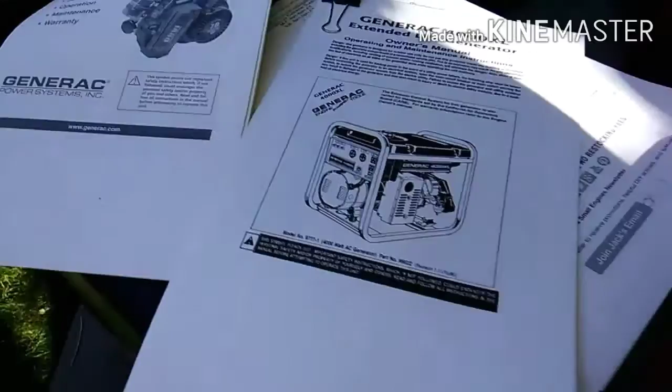Hooray and happy day. So, I printed off these manuals while I was working on this, and I don't need them anymore. And instead of throwing them away, I'll leave them on top of the generator. We're going to do kind of a video bill here / service thing. Anything apart from this carburetor is essentially a maintenance cost and would be needed for any generator. I will go over some of these standard maintenance items now. We're going to go in order of when things were bought.

First thing would be starting fluid, represented by that. Starting fluid cost me, this one's $4.79. Cost me about that. You know, this one would be $5 with tax or whatnot. Anyway, billed you $4 for starting fluid. Used to diagnose things. Won't start. Spray starting fluid in it. Starts running. At least you know you have spark. It's running funny. Spray a little bit of starting fluid in there. See if it starts running smoother. Ooh! An example from the media bin using your own motor.

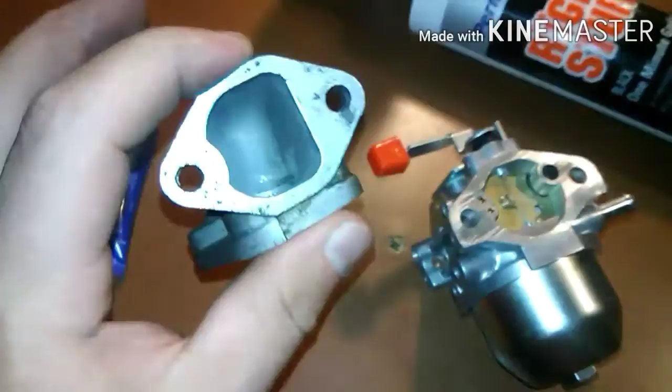Use it to clean things like gasket surfaces. What are some things that need cleaning with starting fluid, you ask? We've taken the elbow off the engine, shucked it and cleaned it with starting fluid. Nature's favorite. The gasket is perma-adhered to the cylinder head. And, well, I just cleaned it with just starting fluid. Why? Because it's cheap, it evaporates quickly, and it's probably less toxic than most things. Very useful product.

Next thing would be an air filter. Here's the old air filter, Generac one. Goes right in here. I think it goes that way, actually. Hey, join me for a filter birthing process. So this air filter cost me $8.54, and I charged you $11.

Next is the carburetor. Here is the old one. It will be in the old bag of goodies. I give away a new carburetor. When this gasket is bad after the throttle plate in the manifold vacuum area, there is unmetered airflow caused by the action of the piston drawing a big breath. So what this would normally do is just simply cause the machine to die.

But because the float is bad and the seat is bad and the needle is bad, what it does is overflow. It just builds and builds and overflows like a toilet. And then there is raw fuel collecting in front of that throttle plate and basically in this elbow right here till it runs out the air filter and onto the ground. You can see on the back side of this where it's been running and dripping gas everywhere.

This carburetor typically on average costs me between $12 and $16 and usually includes things like an air filter. Because of the hurried nature of this one, this particular carburetor, to get it in time, cost me $24.12, and I charged you $32. I know I quoted $25, but keep in mind that I am typically buying that carburetor for $12 to $16 when I'm quoting them for $25.

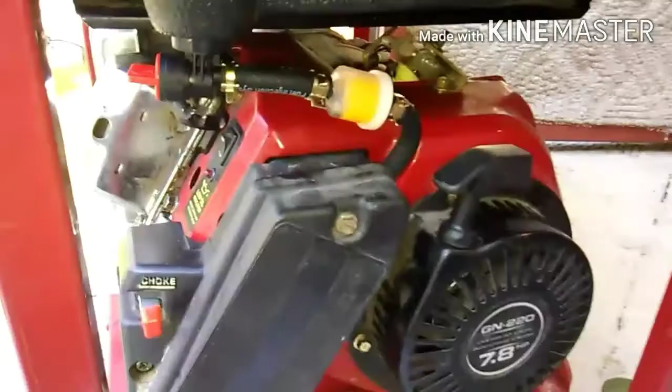Next is this fuel shutoff valve right here. A new one and a new rubber grommet. Let's look at the old petcock with me. It's fun!

Very hard to twist. So this valve is bad, both because it is 25 years old and I used it as a way to modulate the fuel from leaking during the period which I ran the engine to verify whether or not the smoke was burning oil. And guess what? It is not. Hip hip hooray!

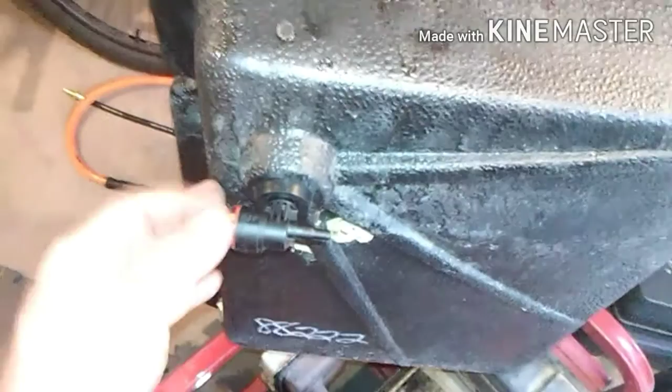Very easy to turn now. New grommet. It's actually cheaper to buy a 3-pack versus just the one. Those cost me $11.04, and I charged you $11, and I was just keeping the extra ones instead of marking those up.

Next on the cost is gasket maker. Exemplary example. You betcha. So we're going to put the right stuff, well, everywhere. On this gasket surface, gasket, that side, that side, that side. We've taken the elbow off the engine. This stuff is approved for fuel contact, basically everything but putting it inside of a gas tank, like direct contact. A greasement has happened.

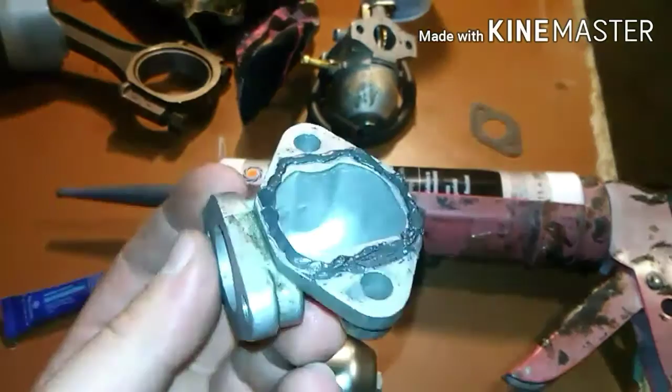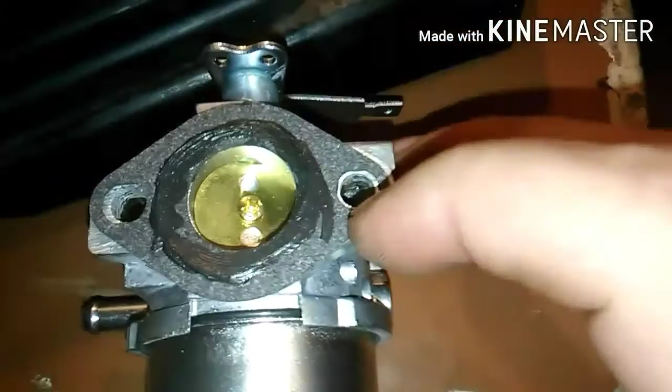Oh yeah, and service alert. Don't get too goopy, because you don't want to glue up your carburetor with it. So yeah, you'll want to blot it down pretty good. Manifold side gasket applied with glue. No glue on that side. This tube right here costs me $26 approximately. Used just over an ounce, costs $2.66 an ounce. I billed you $3 for the right stuff.

Next on the list is new clamps. How pretty, huh? Charged you $1 a clamp, 4 clamps. Anyway, to get the clamps, I had to buy a $16 kit because nobody sells just 11mm clamps or 9mm clamps, either side of the 10mm that never fits. And I burned up basically half a kit doing this, so this kit will do one more generator like this, and then I have a bunch of tremendously useful sizes like 22mm. What the heck am I going to do with that? So yeah, again, $4 for clamps.

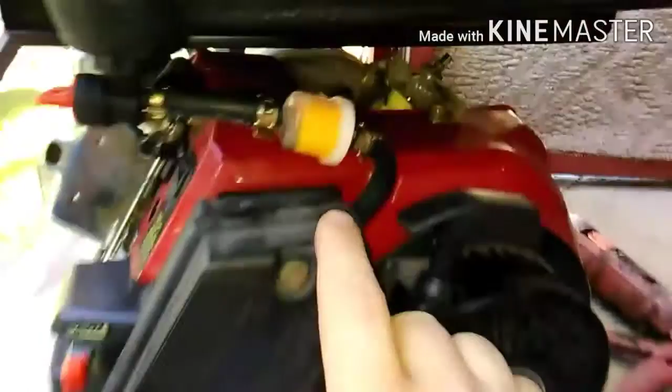The fuel filter is $4 as well. And here's what I ordered. Yeah, I billed you $4, but it's out of a kit of 10. It cost me $15. Mont Bleu! The description, it says no filter, but the picture. The picture! What's the answer? Yes, Mont Bleu.

Next is the oil. This stuff down at the local O'Reilly's is just a splash under $10 out the door, like $9.67. I billed you $7 for a pour off my new jug here. You're welcome. Fill to overflow. How novel. This will help keep it from leaking on the crank seals and help the valve seals and whatnot. This only cost me about $2.40 to give you a pour off this if you buy your oil ahead of time online.

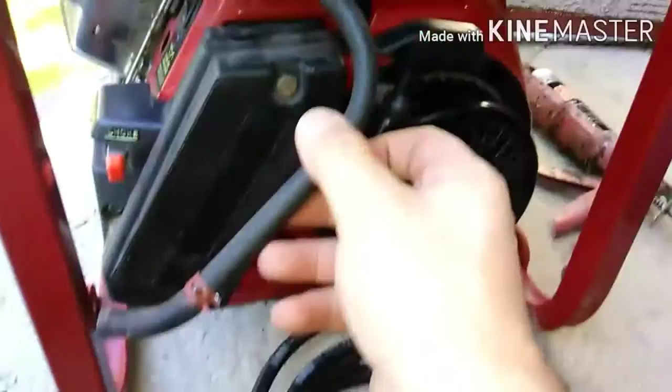Next is the fuel line. Went and bought this really nice Gates hose here. Yeah. Gates. So, yeah, here's the old fuel line, roughly in the shape of the old one. Amazing, like that. Cracker crunchy. Be in the bag of old goodies. This cost me $10. I charged you $3. Cost me about $1.01.

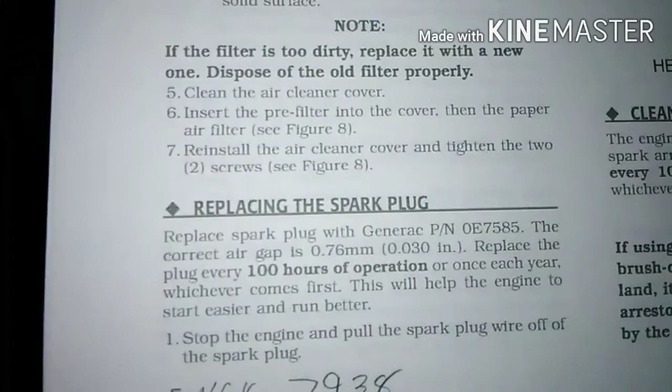Here's the old spark plug. Champion RC12YC. Should be an RC14YC, if you look in the owner's manual. Generac part number 0E7585. Oh, yeah, and then gap it over here. But that would be a Champion RC14YC, NGK 7938, otherwise known as the BKR5E.

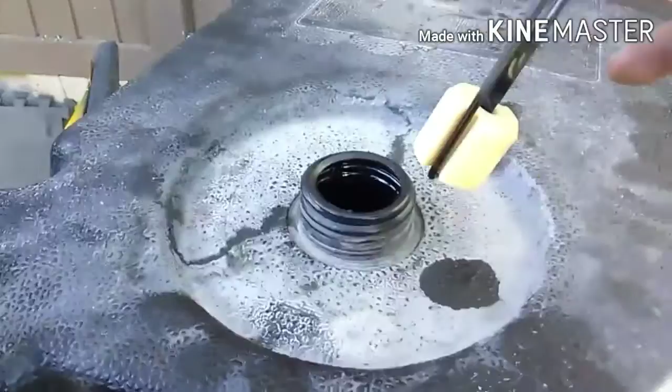Here is the plug that I put in it, and they are gapped to 30 thousandths. This spark plug is 5 thousandths over at 35, and was jet black when I removed it the first time from the engine. I put this spark plug back in the engine to burn off all the Marvel Mystery Oil I squirted into the cylinder. And after it running for a while, this is what it looked like when it came out. This guy cost me $3.22. I'm charging you $5.

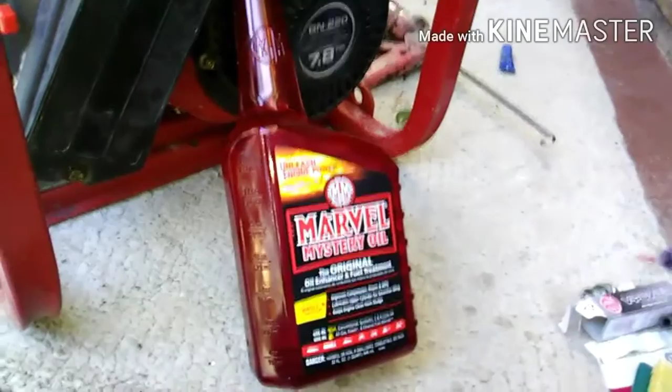When I gave you a pour of my oil over here, I also put in Marvel Mystery Oil. So this holds 21 ounces crankcase capacity. So I put in 4 ounces of this and 17 ounces of the Max Life over there. And then I also put many syringefuls of this inside the cylinder to help loosen up the rings and also try to help break the glaze off the cylinder walls.

Alright, we're going to go down. We're just going to coat everything. Come back up. Oh. That was embarrassing.

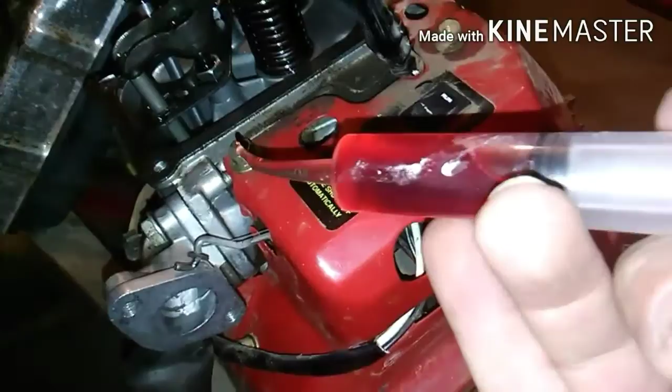Occasionally, throughout walking by, just kind of rotate it through this cycle. So what the elixir does is very helpful in dissolving the bad gas. Gonna go ahead and give these valves just a little bit of a squirt. Sure.

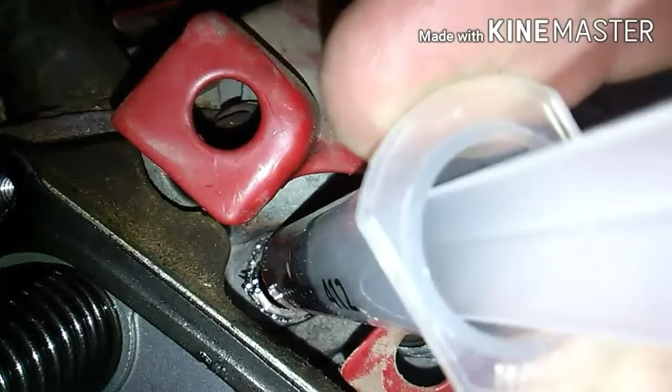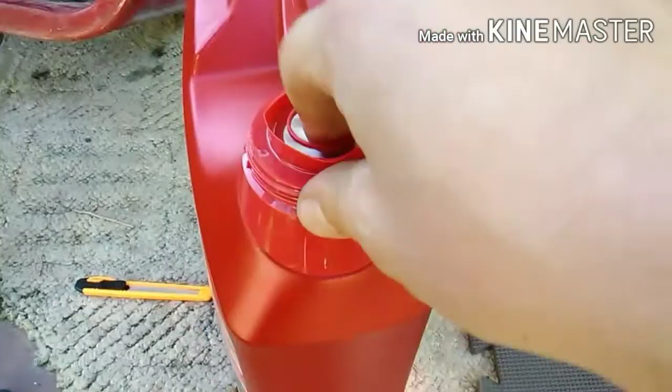She's been running a good 2 hours out there, and I was going to go give her a little shot of this in the intake very slowly while it was running, make a lot of smoke, make everybody in the neighborhood happy.

It's a new swish bottle. All right. Hello, bird.

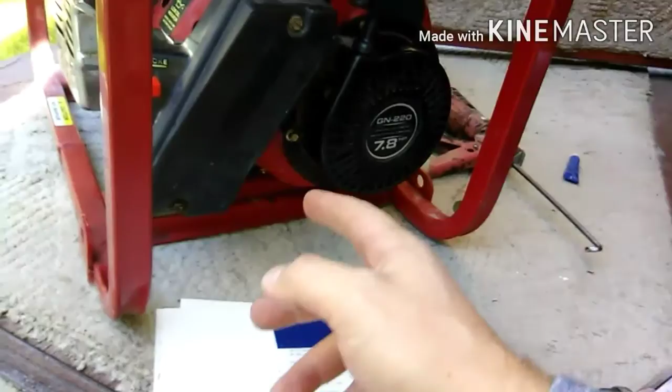Next was gasoline. I bought gas once, $5 worth, and then I bought gas again, $5 worth. The first time was when I was diagnosing it. Actually, bought gas 3 times. Well, whatever. I only billed you for twice. Yeah, I guess the first gas is free. Yeah, because I put gas in it while I was flushing it, and then I bought gas again to flush it on video.

We got our general flushing kit here. We got the star of the show from earlier. A general collecting jug. Fuel from the first flushing event. Take this lovely thing. Do our shake, shake, shake I'm so fond of.

Loctite. We put Loctite on everything. There's a bottle. We will also apply Threadlocker Blue by the very same company. Blue applied. But they have lock nuts on them. Put it on anyway! Bottle of Loctite. Been using it. It's expensive. Billed you $4 for it.

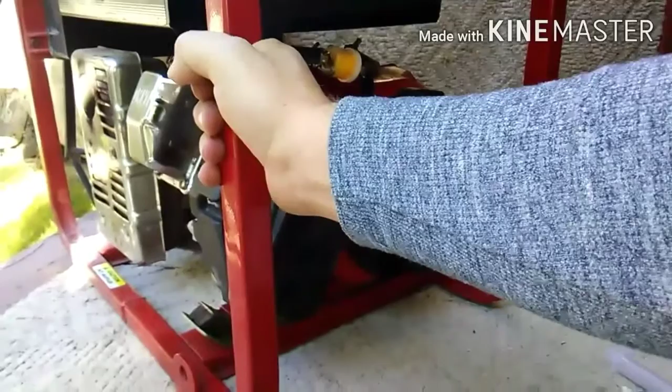When you dropped this off, our quote was approximately $83, $85. $20 to replace the carb, approximately $25 to get a replacement carburetor, and then $25 for the breather hose right here that is missing. It is right here in your bag of goods. I will not put it on because it is a fire hazard. It'll fill this case full of oil and be quite dangerous.

And then you also need the governor spring, which is only $2 from here. But if you buy it just alone from somebody, they charge $13 by the time you pay for shipping. And then you do need a valve cover gasket. The old one does not seem to be leaking, but it is broken. So here is that valve cover gasket number. And then here is the phone number. You can certainly call and order over the phone.

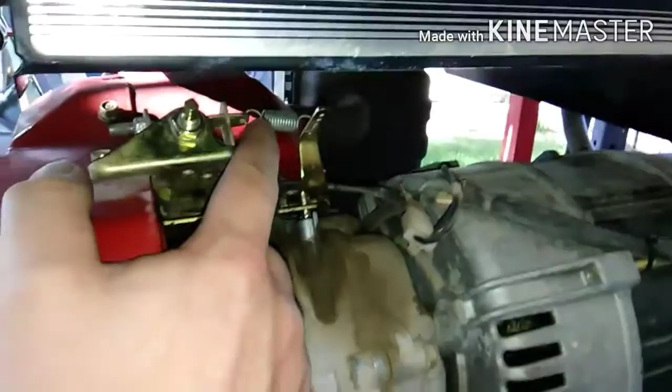Here is a lock nut number that I forgot to add to here. And then some parts diagrams that I did not throw in the garbage that you are more than welcome to keep. You are welcome. That lock nut is right here. So yeah, that is the lock nut for this part number. And then this spring is this spring right here on the governor. And then the valve cover gasket is obviously this rocker arm thing here. So, yeah.

Yes, this is a fire hazard. It's going to spray misty oil over everything. So, yeah. Don't really know what to do. I'm going to put it on going that way. Yeah. Like a big old flag. Fix me.

So yeah, between the carburetor and this hose, that was $63. I just bought the maintenance things that I needed to get it running, to show that it works well, that it's worth buying, that kind of stuff. Hooray! So the only stuff out of this pile that is not maintenance is this carburetor right here. Everything else, the petcock, the air filter, the spark plugs, the oils, the starting fluid, the Loctites, the glue. You're going to use that with any unit.

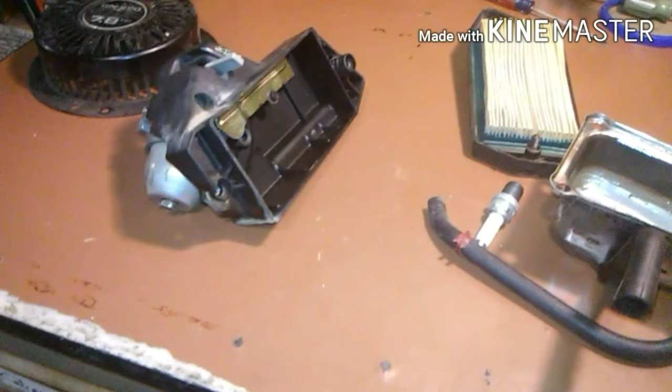You saved enough money on all these parts by getting them through me to actually pay for all the labor. For $20, I attempted to clean this thing and fix it. I diagnosed this huge vacuum leak. Vacuum leaks sound like hippie frou-frou a Sheila would buy at a Whole Foods. This is the reason the generator is here.

This vacuum leak accompanied by the fuel leak situation explained earlier with the carburetor. All these issues I'm about to lay out play off each other, and we start out with the choke, and it seems a little odd. But I promise, I picked it all from the editing bin, and it all works out.

The first problem we have is the prior operator was modulating a runaway engine by applying the choke. There was disagreement, shall we say, on whether the arrow meant on or off. I removed the lid of the air cleaner so we could peek in through the side here, so I could show him that in this position is off, and that one is obviously on.

The runaway engine, defined as RPM raising to the point where speed is modulated by applying this choke to restrict airflow, and therefore saving its life, or the valves moving so fast that they can mechanically move no faster, therefore governing the speed before it explodes, essentially. And yeah, I mean, the voltage would have to be out of control.

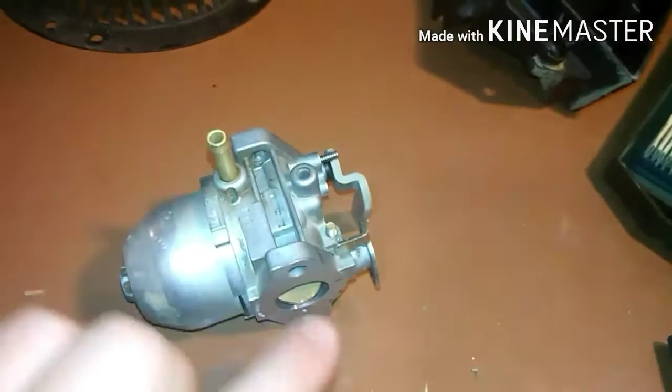But oh, my dirty sundries, you say, the governor, the governor. Yeah, not the governor. Okay, let's go back to this object here. All right. We were introduced to it this way. This is the choke. So on the other side, there is a gigantic vacuum leak here from this thing. Who would have thunk?

Ah, but Mallywalk, the fuel. Air is only one part of the equation. Where, my lad, does the fuel come from? I have infused this rare and illustrious wonder wand with the power of radium. Choke, throttle. Restriction can be made by closing the choke and by opening and closing the throttle plate. Notice it cannot close all the way. That is how idle is set.

Gasoline enters this equation through this tube here and proceeds to fill the carburetor bowl. At one point, a float will stop the flow of gasoline from being pumped in by gravity through a needle and seat combination with the float. When this gasket is bad after the throttle plate in the manifold vacuum area, there is unmetered airflow caused by the action of the piston drawing a big breath.

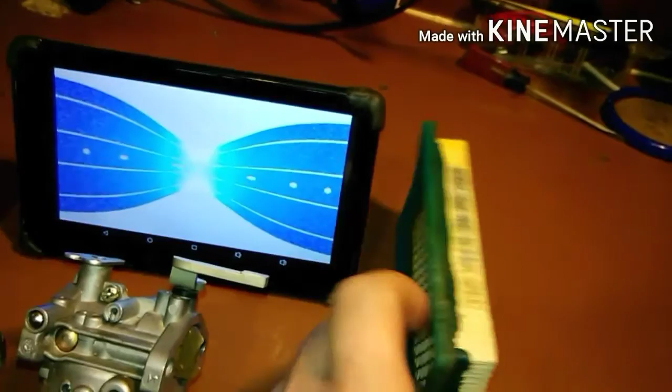Because of the nature of the restriction, there's going to be lower than ambient air pressure, and then this cycle starts. And what's exploited in this cycle is there's a tube right here that vacuum can be drawn from, and that was that little brass nub you see. And then that piece of brass in the middle is the main carburetor jet.

Engine speed is dictated by this flowing, as you see here. When there's a hole, see, when this gasket is bad right here, there's essentially a hole here. And because this animation is being fueled by the act of this piston drawing a big old breath, it doesn't matter that the Venturi doesn't work anymore, and it does not matter that it cannot fuel itself through this Venturi action, because essentially fuel is being pumped into this end of the equation by gravity from the fuel tank.

Running with this unmetered air leak and this unmetered fuel leak will eventually lead to engine damage, and that's basically, we're really close to not being able to bring it back to life. I took off the spark plug lead, I removed the spark plug. The spark plug was fouled, black, and not the correct plug.

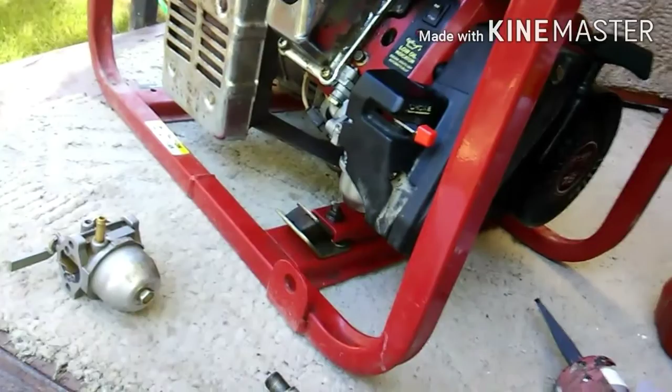I performed a compression test, 100 psi. There is no statement from the manufacturer for a specification for compression testing. I performed a differential leak down test. It showed a 10% leak, which is excellent.

As far as Briggs & Stratton is concerned, this engine here is basically brand new because of what this instrument here says. I have these all hooked together here in synergistic madness. I'll pan back a little bit here. Focus, thank you. So what we're going to do is purge and make sure that all these gauges come back and always read the same thing. So, got 30, 30. This one's just a skosh over.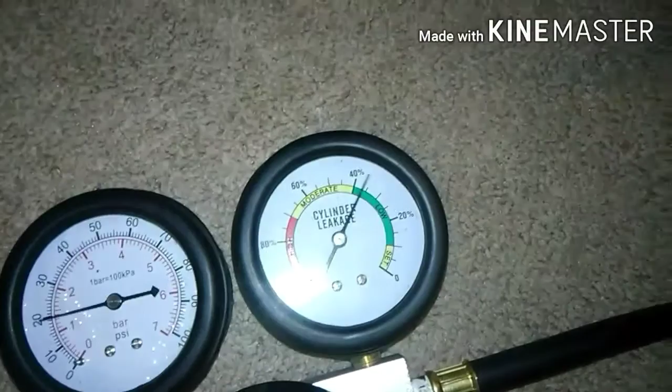Yeah. Okay, now this one reads 25 approximately. And see, this one is consistently off. So we're 5 off here. We're 2.5 at 90. And we have a notation. Yeah, so. Yes, we're going to go ahead and crank this up to 90. Oops.

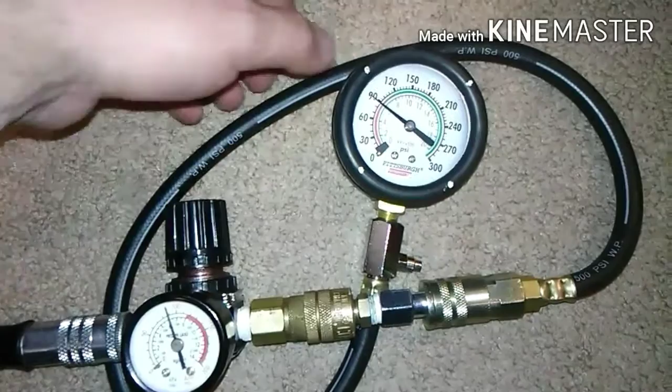All right, there's perspective to consider when viewing from the camera. I'm looking directly over the gauge, and from the camera, this one looks just a skosh under, and this one also just a skosh under. But, yeah, as you can see, pretty much 100%. Like I'm giving a plus 2.5. To be courteous.

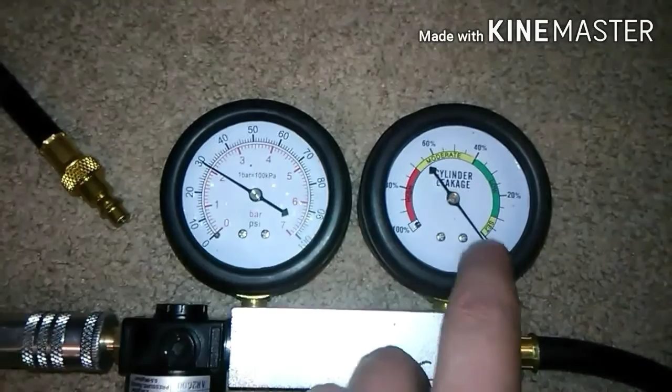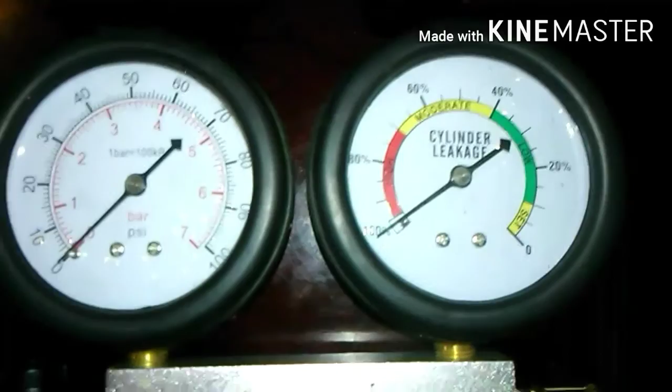This is like an energy audit for your home, except for your cylinder. So, this is basically them putting that big fan in your door and telling you how much in percent of a leak you have, and this is doing the same thing. So obviously 0 is fantastic and wildly unreasonable. If this says bad, you don't just throw something away. But if it says good, it's not necessarily fantastic at the moment either.

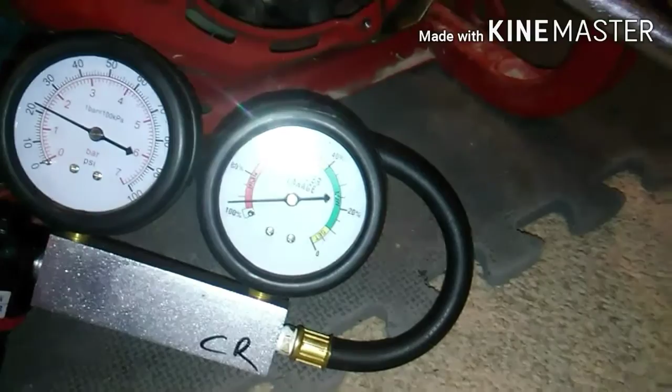Okay, this is where we are in the exhaust cycle. We're about to push out all the exhaust. So here's the exhaust valve, push down, and then you can hear the air coming out of the exhaust here. We got approximately 22 going into our gauge, and we got 100% leakage because it's all coming out the exhaust.

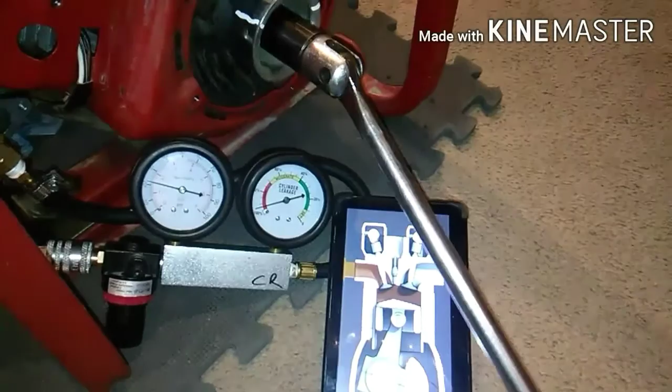This is an index mark. This is a compression release mark for the intake cycle, and this longer mark is top dead center. So I'm going to start this animation and then try to frame all this in while I twist it. So okay, so now we're coming out the intake. Taking a drink.

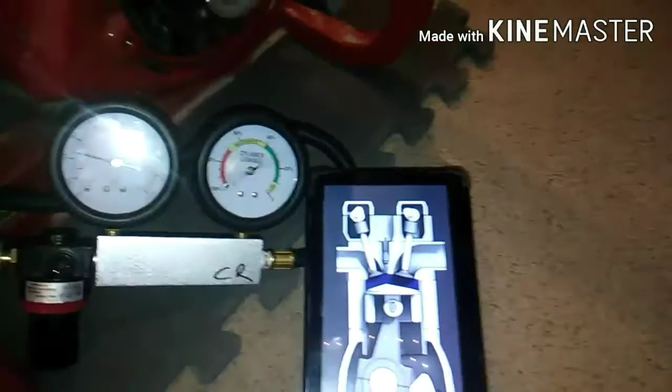All right, we gotta go over that compression release. Our leaking is not very much. So we're gonna go all the way to top dead center. Okay, so my hand is off the tool. Yeah, so we got essentially 10% leak down. Top dead center. And as we go over,

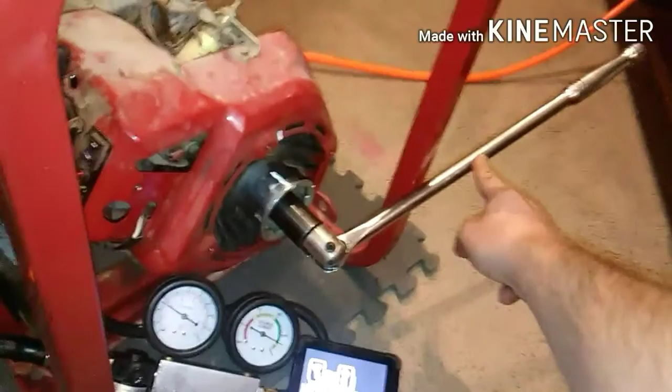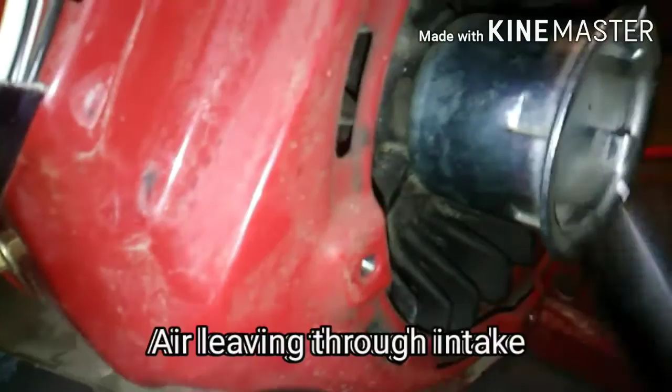what it's going to do is bump this breaker bar out of my hand and hit it into the floor. So, yeah. See, that's why you don't use a 90-pound tester, because if that comes around and hits you in the face, it's very unpleasant. See, that's over here again. Over the compression. There we go. All right, and then back.

I performed a visual inspection with the borescope camera. The cylinder wall appeared to be glazed and not happy. All right, I'm going to go ahead and... Yeah, camera's down in the spark plug hole. Got our image tube. Okay, here we are. Focus, thank you. Oh boy. Worked better in the first shot.

I am turning the crankshaft and therefore the piston up and down with this hand off frame in the camera. Well, you can't see, but there is a little bit of cross-hatching here. I think what is visible is the amount of distance between the piston and the cylinder wall here. There we go. But can you see the reflection of the piston going up and down? There's a little white spot right here. Okay. Look at that, and you can see that in the cylinder wall.

As it goes by. Yeah. So see, that's all glazed over. But there's ways to get that off. Not always successful. Usually just running them for a while without the choke on will help things out.

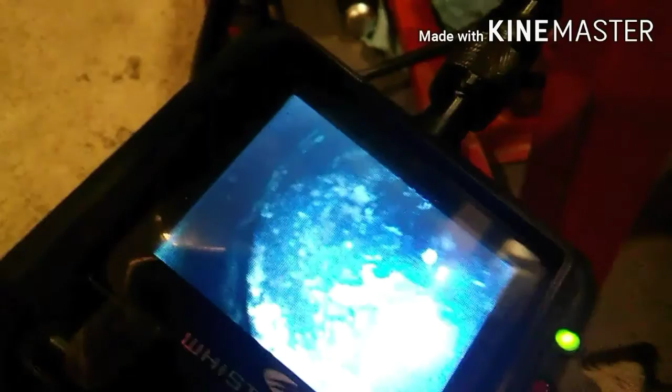You saved enough money on all these parts by getting them through me to actually pay for all the labor. For $20, I attempted to clean this thing and fix it.

I diagnosed this huge vacuum leak and the sticking float causing the fuel to overflow, making the engine overspeed and run away. I took off the spark plug lead. I removed the spark plug. The spark plug was fouled, black, and not the correct plug.

I performed a compression test. 100 psi. There is no statement from the manufacturer for a specification for compression testing. I performed a differential leak down test. It showed a 10% leak, which is excellent. I performed a visual inspection with a borescope camera. The cylinder wall appeared to be glazed and not happy.

I applied Marvel Mystery Oil in the cylinder to help break that glaze and free the rings if they were indeed stuck from old fuel. Occasionally rotated the engine in both directions to jostle the piston rings. We need about 5 times more fabulous!

Jiggle, jiggle. After affronting the generator with such quality, we was able to put in a new fuel filter and those new clamps to hold said filter. Then install a new NGK plug, and then run the unit and assess what further stuff needs to be done. And oh yeah, the fuel tank needs to come off to do anything I just mentioned.

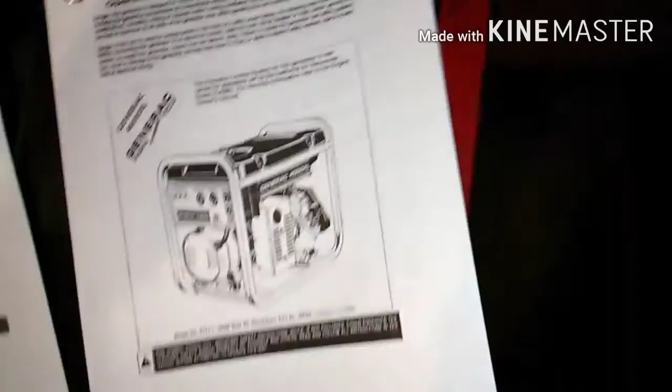A panoramic sweep for my friends, but the real question, ladies and gentlemen, does he have pants on? In the 50s, we would beat our women for setting the valves so tight. But it's all good now.

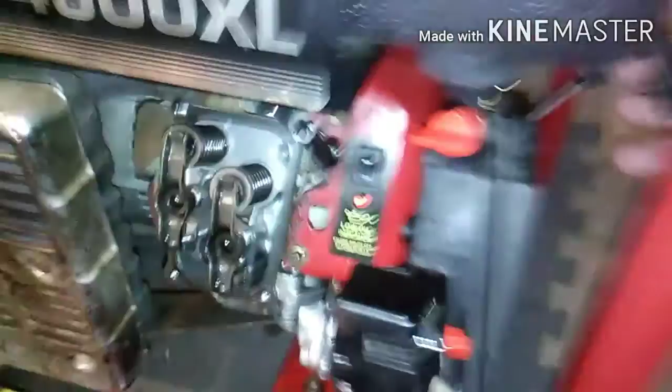For a venue, we've got this nice Berber. Just pop this cover off. Just come over here, give this a little pull. What we want is for this one to be down. So it's 4,000. Perfect.

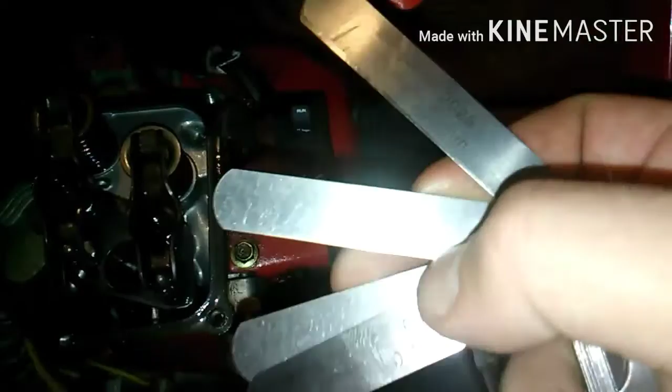Alright, now that this valve's opening, we can do the exhaust. You can already tell right away there's some lash. Just go right with 4 at the beginning. Oh, she's pretty snug. Almost like I've had this cover off like a dozen damn times. Yep. Ta-da! Intake, exhaust.

You need to be careful when doing this one because there's that compression release in the cam you saw earlier in the video. So make sure she's really pushed down good. The book says do this all the time. I would think, with this piece of industrial equipment that it is, it probably doesn't need to be done that much. Especially since it's like the most ridiculous valve lash spec I've ever seen.

I'm just lucky I had bought a new set of feeler gauges to use with the new straight edge. Oh. I was just, oh. That was fun.

So many times with the on and off, you say. I wanted the generator to run well for some length of time on good oil, and then check the valves. Make sure it didn't knock any carbon or whatnot off, and she looks great.

Ooh! Segmental recap for valve train rocker lash inspection adjustment. First, you must source the specifications for said valve lash. Then remove the rocker arm, quote, cover. That cover gasket is damaged. I supplied you with the part number. You are welcome. Then you must remove the crankcase breather hose, which was previously removed before doing that video. That is why it's on backwards.

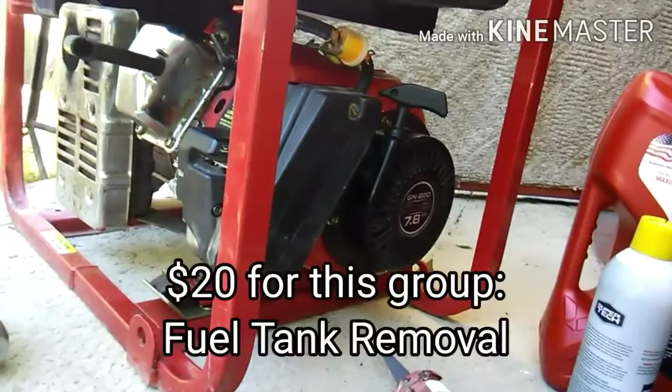Remove the tank petcock and grommet. Clean grommet area of tank. Install a new grommet and petcock. Fill with fresh fuel. Refasten tank when appropriate. The tank has actually been installed and removed probably 50 times. That's a whole lot of hey for not a whole lot of $20.

Governor, verify, and adjust. These things consist of setting the low idle on the carburetor, setting the idle electromagnet limit range. Alright, first step to adjusting the governor is wishing you had wheels. And then it's actually warming it up.

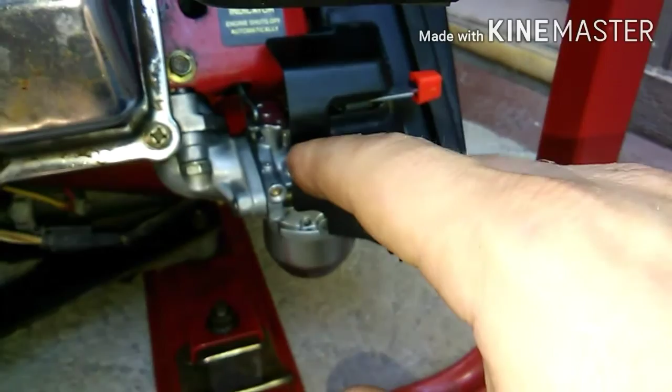And then if you sit and watch it for a while, the lowest it will go is 100 volts. And then you're not messing anything up, and basically anything you plug into a wall would actually run on that lower setting. So like a desk lamp or something, the generator would be so much quieter.

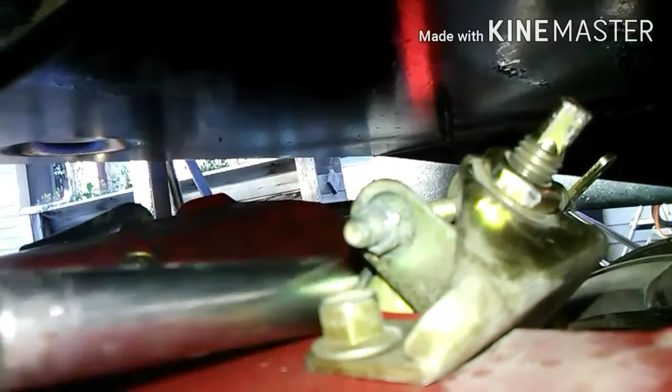While this is not jiggling everywhere, I'm going to back off this governor nut and put some Loctite on it. There we go. Slurp some of that up there. Yeah, that's the spot I was worried about. Okay, put that back a little bit. Alright, our voltage control is off.

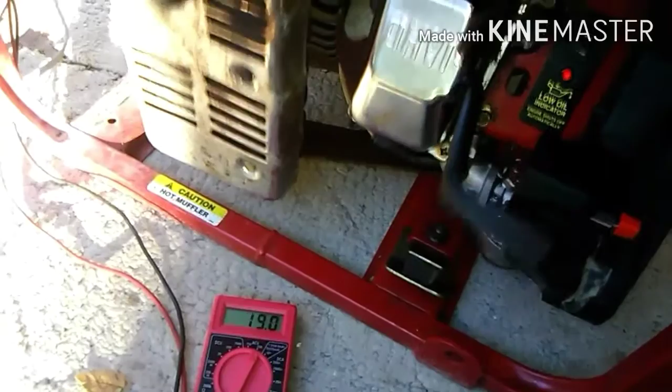So I have found when it says it's empty on that, it starts doing this kind of surgy thing. So go buy some more gas, I guess.

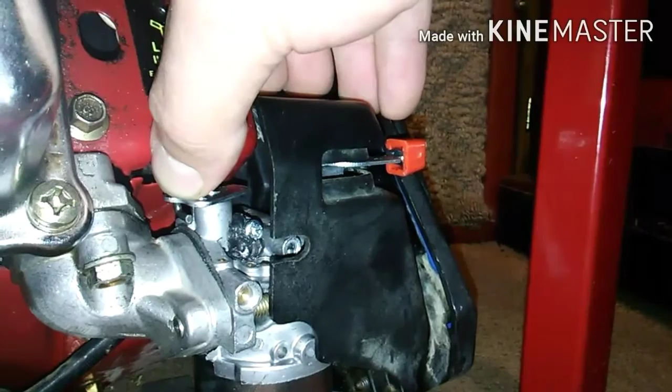So this effect may or may not be happening depending on when I shot the video. During the sine wave portion, you'll see it is actually happening, and that is why I have the scope out, because I'm trying to figure out how big of a problem this actually is, how much it's affecting the sine wave. Because on the voltmeter, nothing's really changing, and then I put it on an analog meter, and it looked even better.

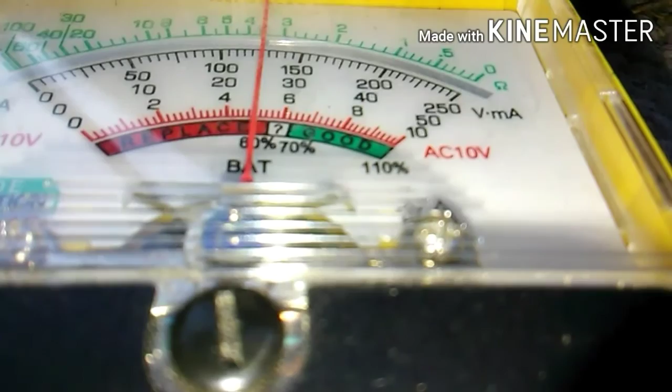So it's got this every now and then, but what I'm trying to show is that it's more bark than bite. There's a lot of rotating mass here, and that mass doesn't just instantly slow down or speed up just because this decided to have a little. I did want to note it because it's going on in the background while I show this scope, and that's the reason I had the scope out, is to see more bark than bite, question mark.

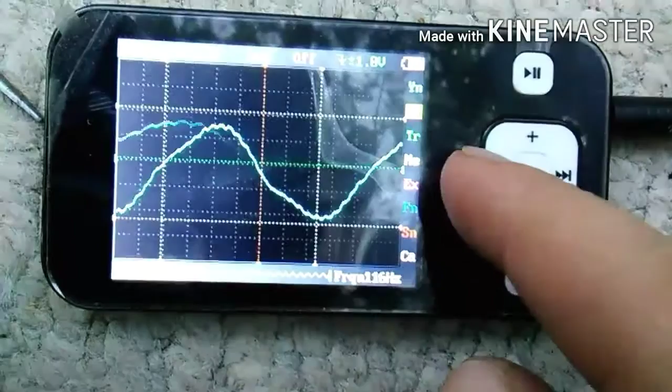Back to Sensei Fabuloso and the problem. I'm going to title this Pong Drift. It's hard to write through the phone. And what we got going on here with Pong Drift is our court is just, well, it's just too darned big. So what we got here seems like a good idea. Like the wide lanes in Seinfeld. It all seems like a good idea, but this is that noise, and there's a lot of room to just sort of fuck about. Uh-oh.

So yeah, our Pong ball is engine RPM, and it's all over the place. And, you know, screwing up the vertical hold, too. It's making a drunken helmsman out of this throttle here. So what we need to instigate is tweaker Pong. When you play tweaker Pong, you need a Pong court about that wide, yeah. And you need to exist between that. This side would be the idle stop.

And this side would be the governor, G-O-V, and so on. To live on the edge that is tweaker Pong was not what we had going on over here in a lot of shooting this video. Most of this video, the screw was pretty much backed all the way out, so this unit would idle. You know, if it was just a stationary engine not doing anything, it would idle quite slowly. That's how this carburetor was set when I put it on there. And then, because of that, it had such a huge range to go this direction.

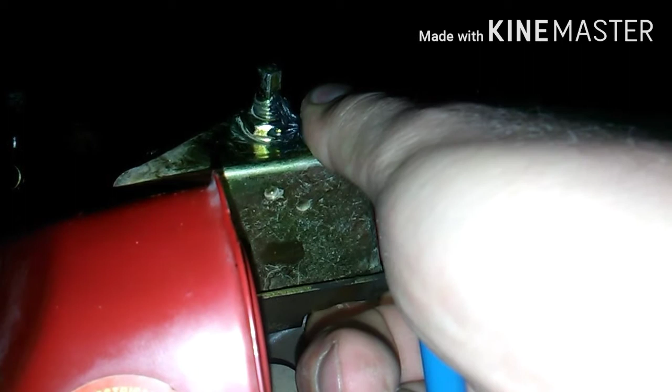What you want is for this to not pull so hard. You don't want it to go bang so hard that you're hurting the linkage on the carburetor. So that's what you're trying to accomplish here. So this thing really shouldn't ever have to be adjusted again unless a new carburetor is installed. And when you tighten the jam nut, it screws everything up. So you got to do it like 500 times.

Live from the lectern in the narration booth, it is a recap. Governor adjustment, which consists of set low idle on carburetor, set the idle electromagnet limit range, Loctite magnet jam nut and governor rod lock nut. Inspect and adjust voltage output at governor rod lock nut. Check sine wave output for general stator health, which was fantastic.

Please note, the unit requires a new governor spring, part number supplied. Unit appears to have a defective controller board for idle step down. Current bleeds off and electromagnet releases randomly. Unit also needs a new lock nut on the governor rod, and the governor rod needs to be replaced as well.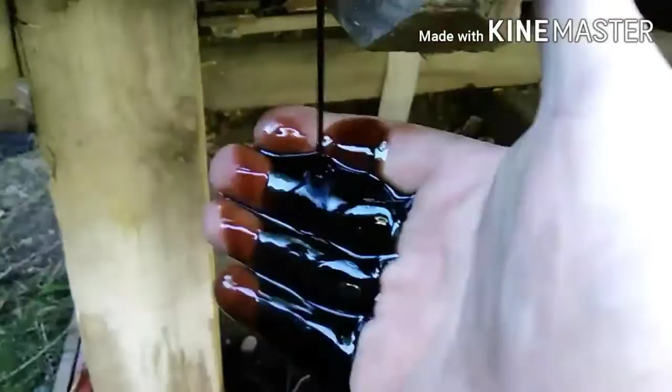But times are a-changin', and the oil is too. Changing the oil. Drain the old motor oil into a suitable container and take to its appropriate recycling location. Tighten that drain plug. Install 17 ounces of Valvoline Max Life 5W-30. Install 4 ounces of Marvel Mystery Oil. Please note the unit holds 21 ounces total for future service needs. You're welcome. All that done goodery, $5.

I am Unstra van Frava, and I will take you through the final process of checkout. Starting fluid, $4. Air filtration, the genuine, $11. A new carburetor, replete with new null essence. Keep away from babies, $32. Isn't that fabulous? A petcock and grommet, $11. Room temperature vulcanizing sealant, $6 for your portion. Clamps, 1, 2, 3, 4 clamps, $4.

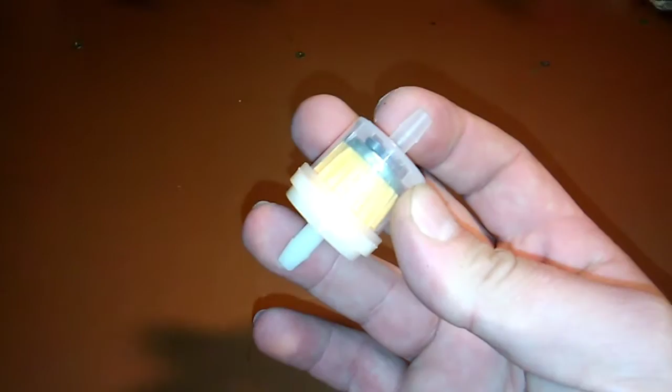A fuel filtering element, $4. Swill of Champion Valvoline Max Life 5W-30, $7 for your portion. You gotta pick 'em by sound. That's how you know they're good. A fuel line, $3. Replacement pluggery, $5. Marvel Mystery Oil, $5. $15 for gasoline. And for eternal tightness, Loctite, $4. If we were to prod an arithmetickler with a hot poker, they would shout under duress, parts, $111.

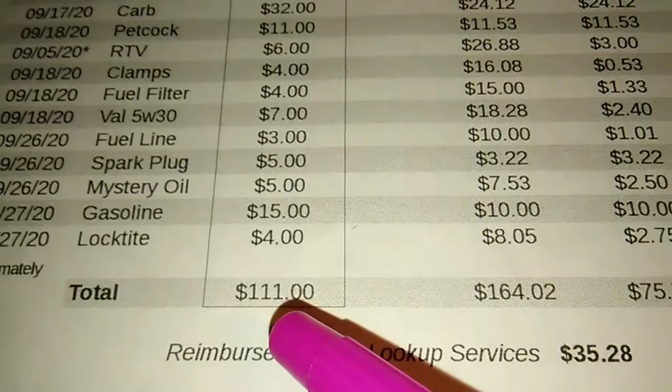If we refer to page 1 of our information dossier, we will find written, oh so prettily, everything in layman's terms that we have just gone over. We will also find, to engage in my pageantry and propage, that I had to spend $164 on props. The amount of props you used was $75.72. For services as prop master, wig master, producer, looker upper, and doings of things, I have added the sum of $35.28 to $75.72 to get $111. Unstra is complete. Page 1 of 13 of your parts dossier.

You take the parts dossier and you add the labor dossier, known as carburetor replacement and the fluffdom thereunder, $20. Valve train rocker lash inspection adjustment and accompaniment, $19.50. Fuel tank removal and all this fun, $20. Governor adjustment and the process therein, $19.50. And of course a marvelous and wacky oil change, $5. Plus the $111, $195 even. Magic.